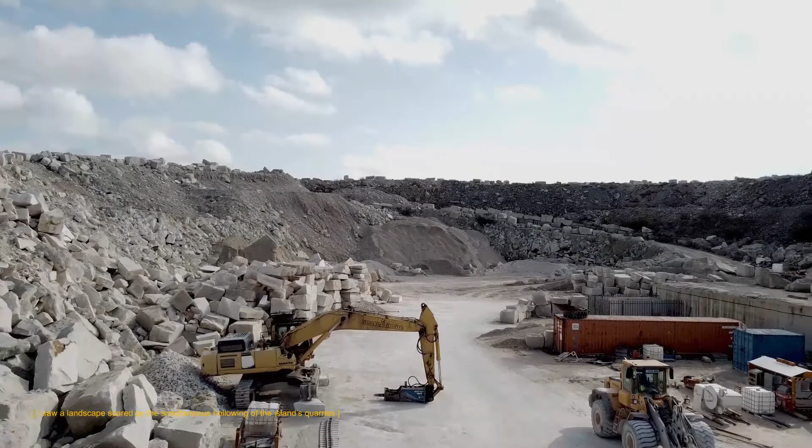On my visit to the Isle of Portland, I saw a landscape scarred by the simultaneous hollowing of the island's quarries and the layering of its offcuts. The scale of Portland's material absence is not comprehensible by the immediacy of the land around it, but only by way of recounting the limestone structures saturating the City of London.

Displaced for over 400 years, the island is one of the UK's largest sources of construction limestone, but the decline of solid limestone construction has replaced stone masonry with cement and cladding production that today accounts for more than 90% of the island's output. As a royal manor, the moving of royal land historically symbolized a transfer of authority, extracted only for the construction of seats of power in the city, governing religious, financial, and development priorities.

In the last century, the shift from sea-based to land-based transportation incentivized the pulverization of limestone into cement, requiring the grinding of 2 tons of limestone for every ton of cement, while breakages from the slicing of large dimension stone into thin, lightweight cladding produced 90% wastage during fabrication.

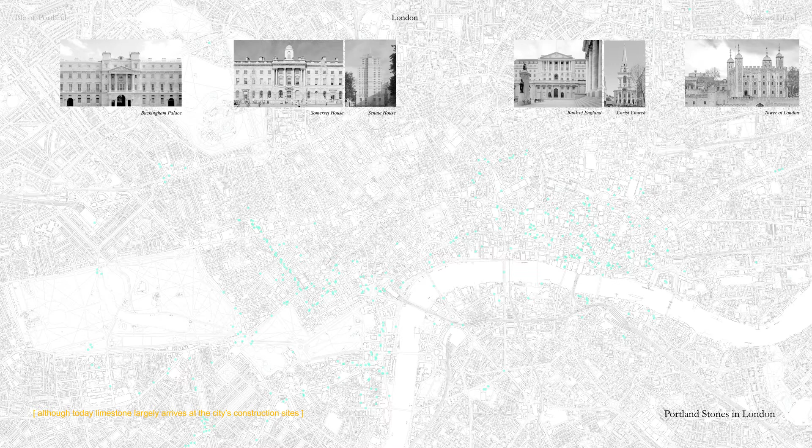Quarrying, the act of squaring natural stone, extracts terrains into unfinished cities, giving cities the illusion that earth does not exist. This is a map of London's remaining Portland stone buildings, although today limestone largely arrives at the city's construction site in the form of cement mixes.

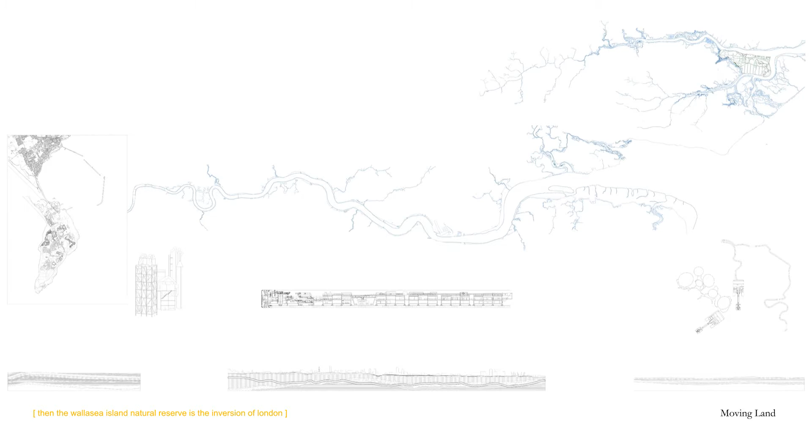If London is the inversion of Portland, then the Wallasea Island Natural Reserve is the inversion of London. The 269-hectare island nested in the River Crouch Delta near the coast of Essex is a reparation zone built to undo the destruction of urban construction.

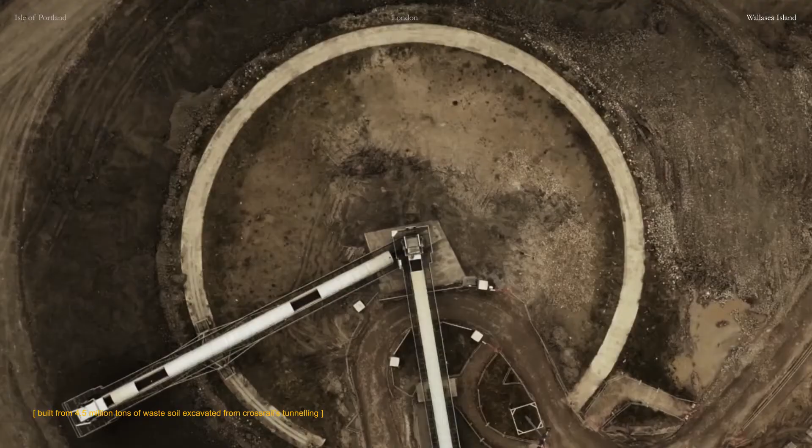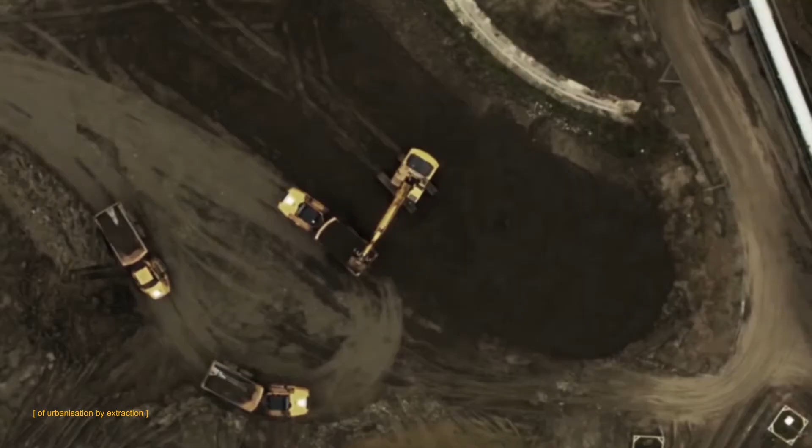Built from 4.5 million tons of waste soil excavated from Crossrail's tunneling, the construction of the island turns cities into sites of extraction for reparative landscapes, reversing a long-standing supply chain of urbanization by extraction through the creation of reparation zones.

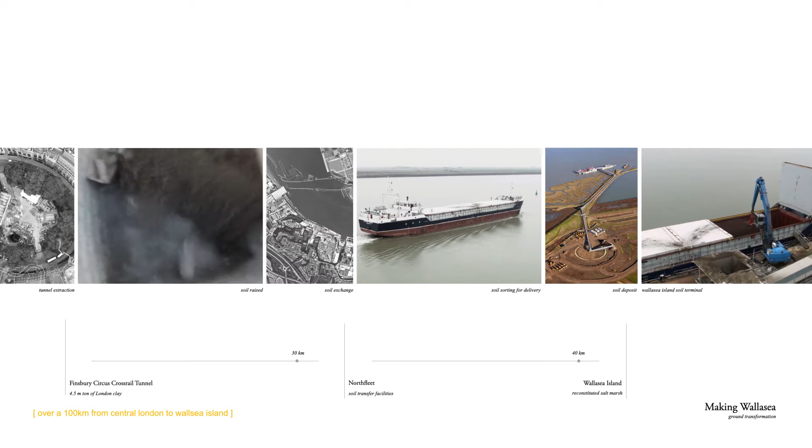To rehabilitate a land twice the size of the City of London, more than 2,000 large boatloads of soil was shipped over 100 kilometers from central London to Wallasea Island.

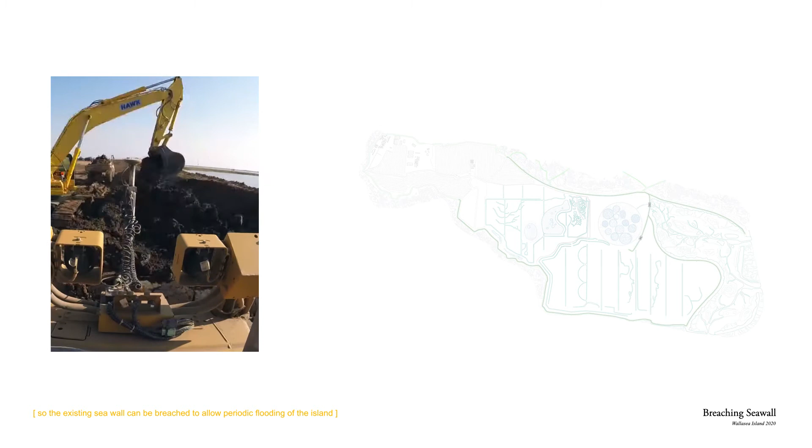The soil was used to raise the topography originally sitting 2 meters below sea level, so the existing seawall can be breached to allow periodic flooding of the island, while tidal regulating dams and saline lagoons monitor the salinity of the island's soil and inland waterways.

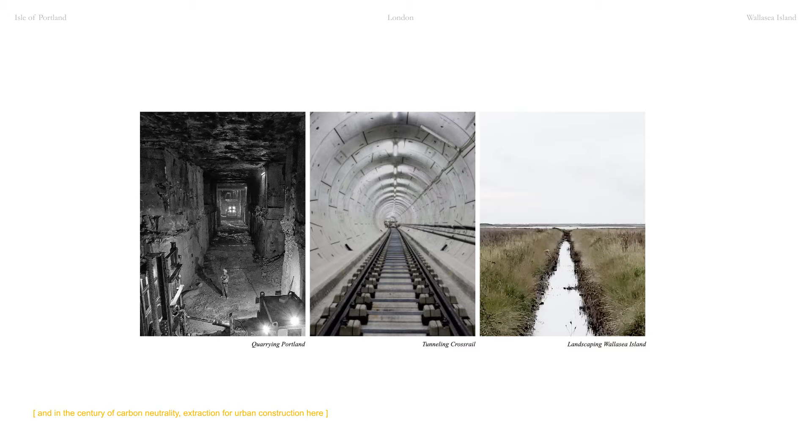Wallasea Island is the inversion of London, which in turn is the inversion of Portland. And in the century of carbon neutrality, extraction for urban construction here should demand the building of reparation zones elsewhere.

Therefore, the construction of the institute itself should become a part of the process of reparation, by challenging modern stone manufacturing and designing with large dimension stone in order to reduce waste and overall carbon emission.

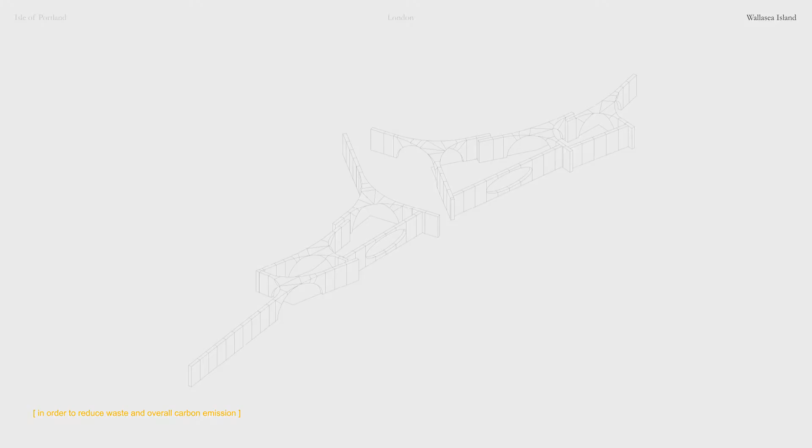As rainwater washes the limestone surface, calcium runoff settles on the ocean floor, forming new layers of limestone sediments while decreasing the acidity of the wetland and surrounding ocean, allowing the landscape to sequester more carbon from the atmosphere by enhanced weathering.

The Institute would extend the landscape into a sequence of limestone structures, hosting residences, laboratories, and a library for the long-term preservation of the island's soil, water, and vegetation samples.

Wallasea Island is not a naturally occurring wetland, but rather meticulously engineered and maintained by a network of urban machines. Its fragility and artificiality allow for its environment to be controlled, altered, and monitored, providing an ideal testing ground to institutionalize the production of future ecological infrastructures and for the deployment of reparation zones everywhere.

The weaponization of institutionalized techniques takes lessons from the painful history of the Portland prison, where the Convict Public Works was founded in 1850 to institutionalize the exploitation of prisoners into quarrymen, providing 10,000 tons of stones a week for the new Royal Navy base at Portland Harbor.

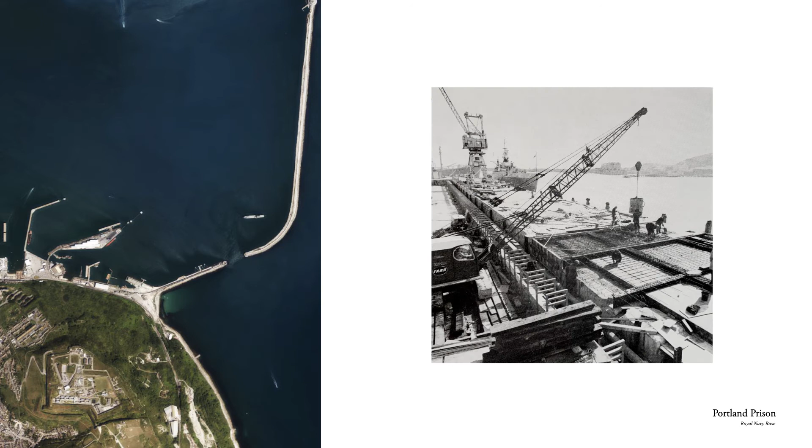The prison became an institute for the mass exportation of construction knowledge, as prisoners were sent to British colonies and forced to settle the New World with their acquired skills.

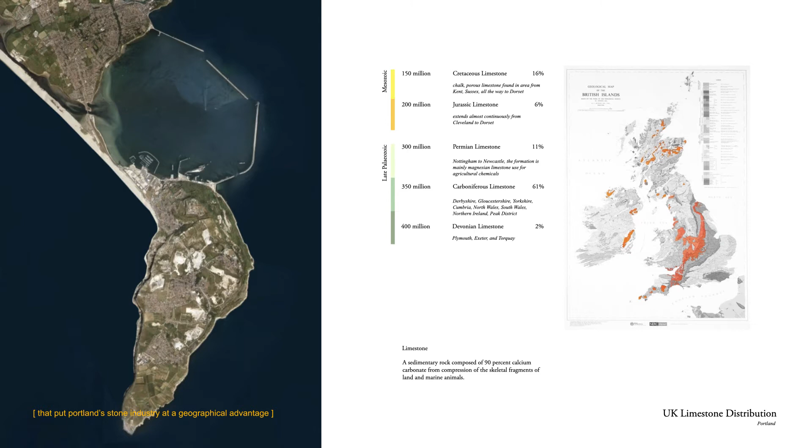The use of solid limestone construction can only be economically viable by reviving the maritime trade route that put Portland's stone industry at a geographical advantage to UK's inland limestone deposits 3 centuries ago. The act of shipping royal stones away from the city to Wallasea Island will signify a bifurcation of urbanization priorities towards the production of reparation zones.

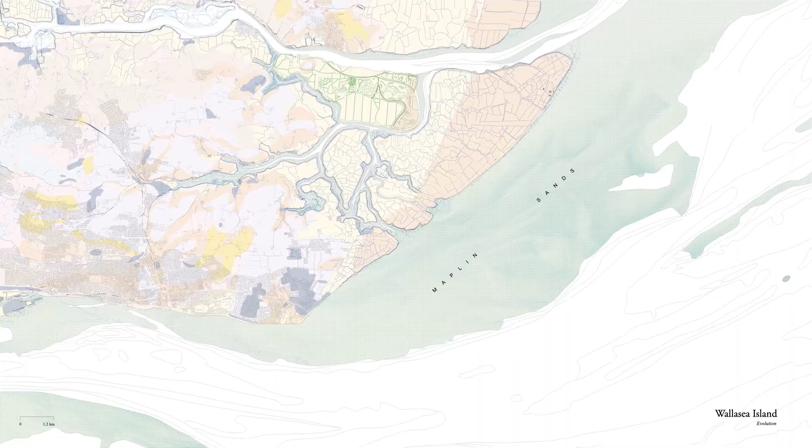The construction of the Research Institute is based on the deployment of solid limestone vaults, prefabricated in Portland, where the offcuts can be processed into reconstituted stone blocks, thereby reducing the total raw stone requirements.

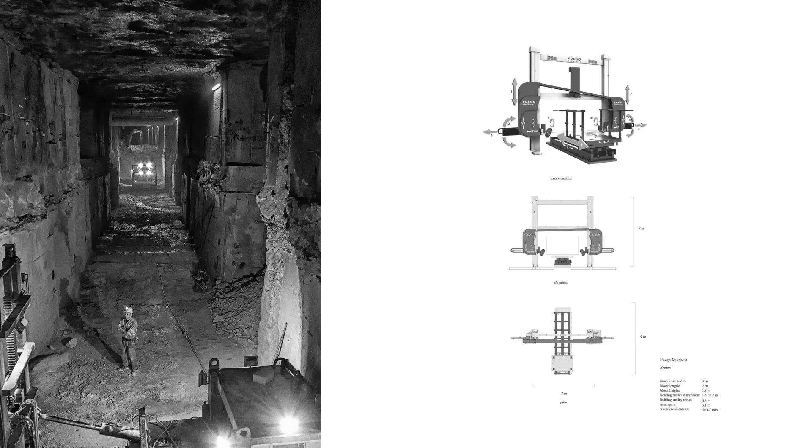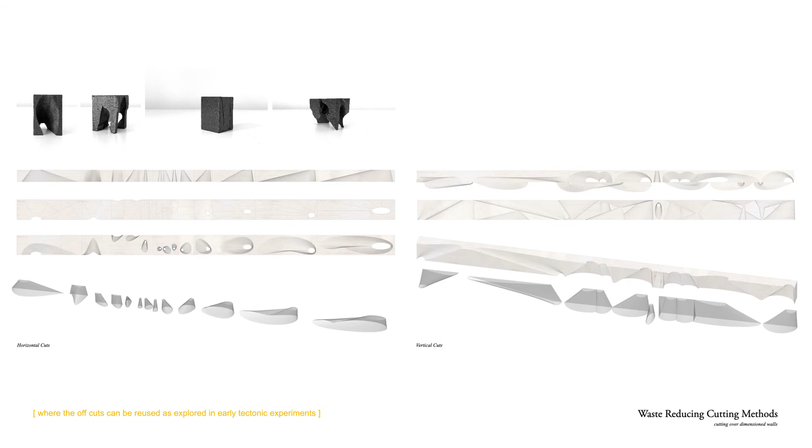Portland dimension stones are increasingly mined underground and processed with diamond wire cutters, where the offcuts can be reused as explored in early tectonic experiments, cut as an over-dimensioned habitable wall for landscape observation, where the offcuts can be flipped into columns to support a viewing platform atop the seawall.

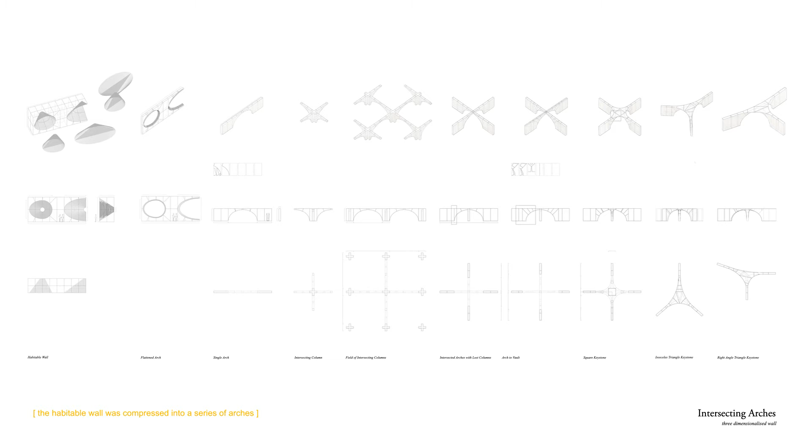To minimize stone use and maximize living space, the habitable wall was compressed into a series of arches and three-dimensionalized by forming intersections defined by a lost column. Therefore, the tectonic is not scalable in itself, but rather its spatial possibility lies in its multiplication.

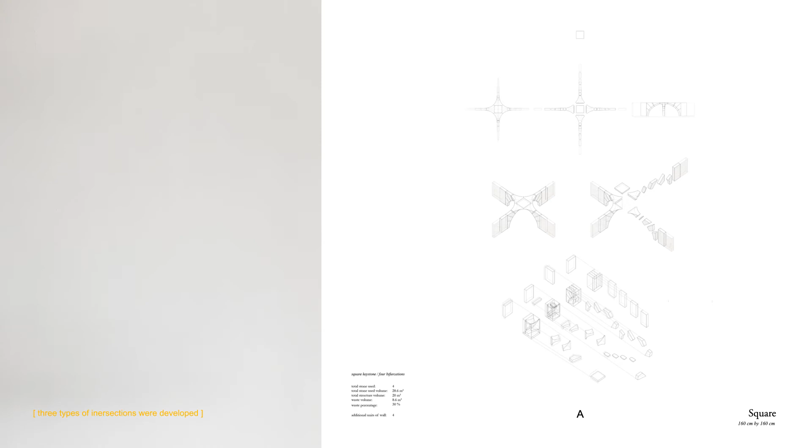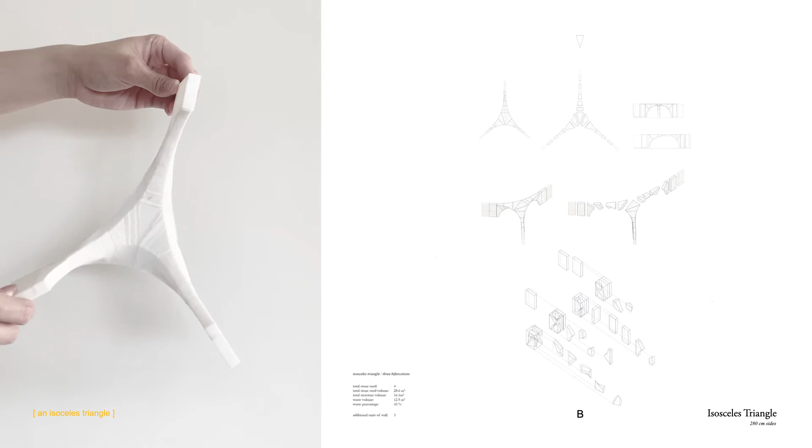3 types of intersections were developed based on different geometries of keystone. The result is a square that bifurcates a space equally in all 4 directions, an isosceles triangle that splits a single space into 2, and a right-angled triangle that combines tectonic A and B. Their intersections become multi-directional transition spaces deployed to organize larger rooms beyond.

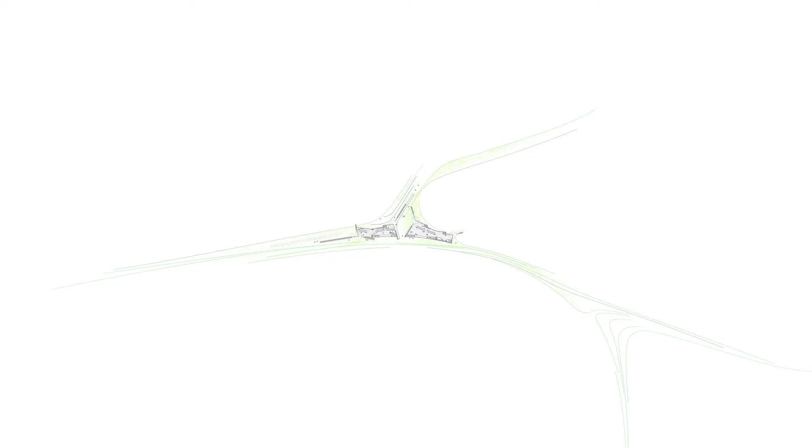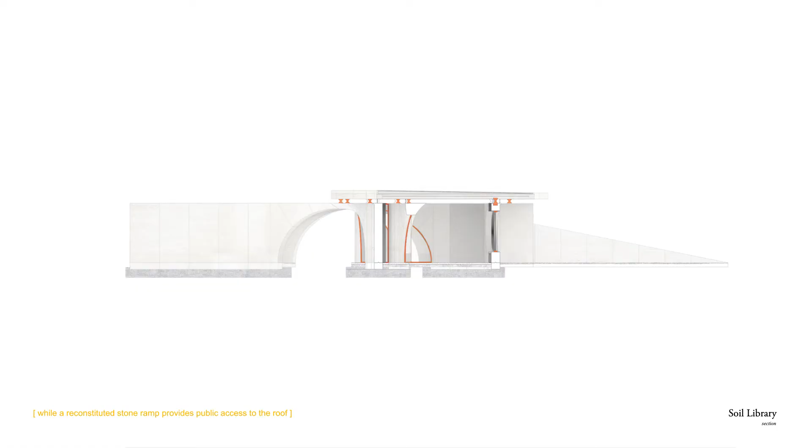As visitors walk towards the island, the soil library appears at the intersection of the jetty and the seawall, projecting from 2 sets of arches into an expanded horizontal view of the island, allowing for a moment of orientation upon arrival, while the reconstituted stone ramp provides public access to the roof.

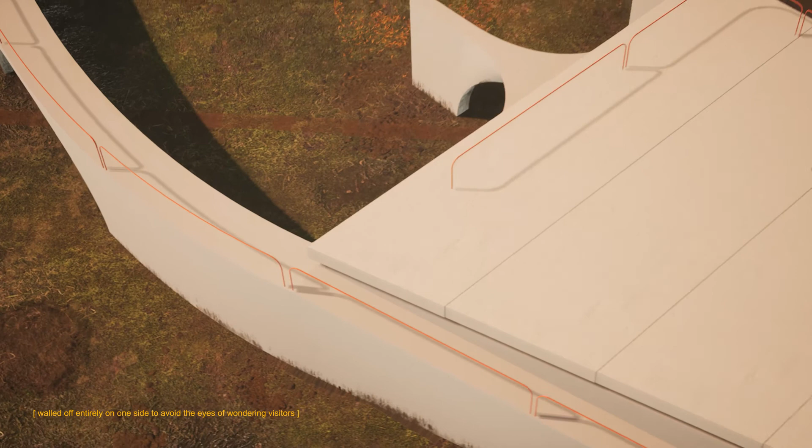Further along the footpath sits the researcher's residence, walled off entirely on one side to avoid the eyes of wandering visitors. The residence is layered with living quarters on one side and shared communal programs on the other.

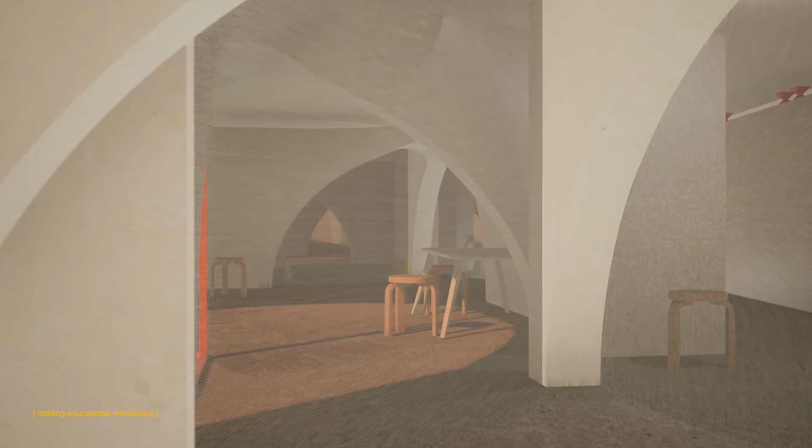The rooms are partitioned by intersecting vaults dressed with thick curtains that can be drawn for larger gatherings, hosting educational workshops on the construction of miniaturized ecologies.

3 courtyard buildings sit adjacent to the residence, facilitating indoor laboratories and semi-enclosed outdoor facilities for wetland fieldworks.

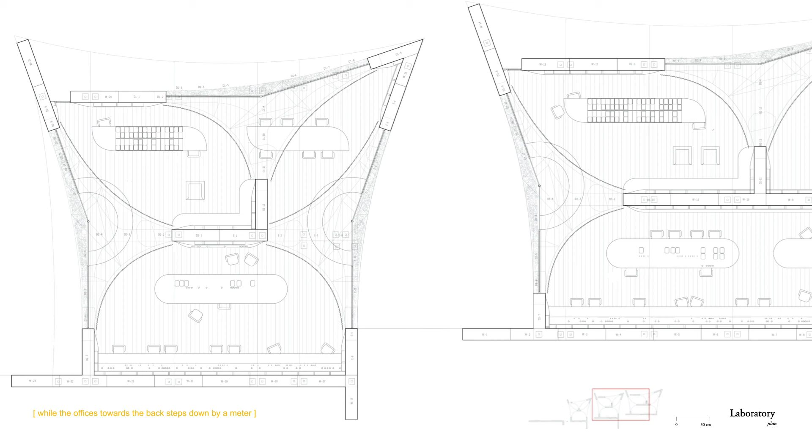Cut by a bifurcating seawall, the laboratories, in contrast to the residence, are oriented towards the public footpath, whereby the workings of the laboratory's front end is entirely open to public view, while the offices towards the back step down by a meter following the existing slope, gaining greater privacy.

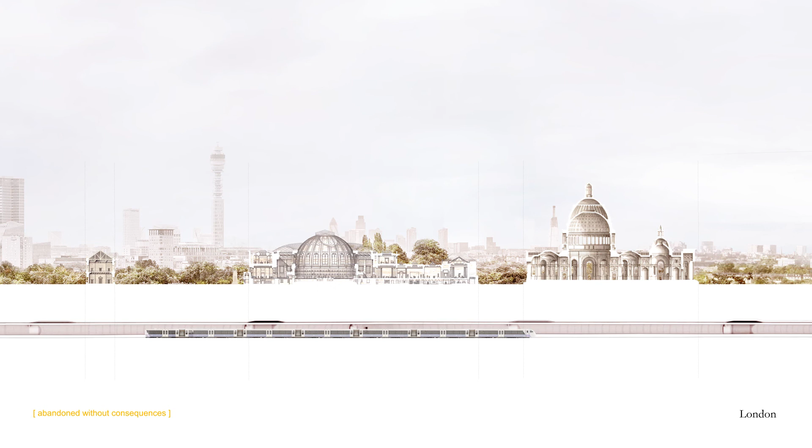Cities give the illusion that Earth does not exist. Sustained by extraction of remote quarries, and blinded by the efficiency of the modern supply chain, the design of our cities is the simultaneous destruction of distant landscapes, abandoned without consequences. Therefore, construction should demand parallel reparations and rethink the impact of building here on landscapes and environments elsewhere.

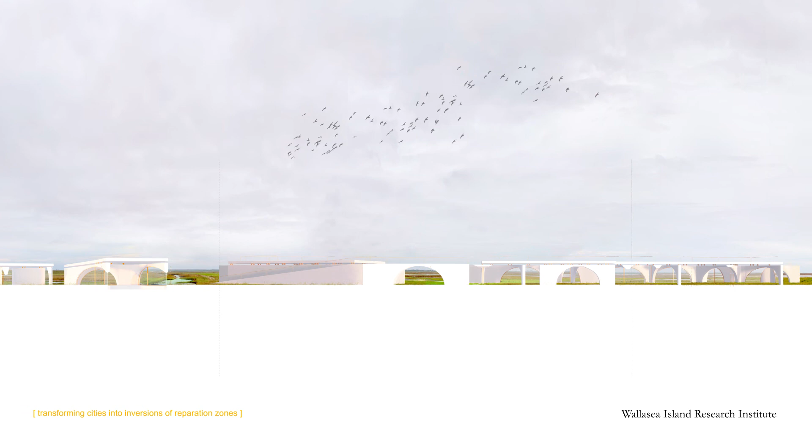Built with displaced stone on an island of displaced land, the Wallasea Island Research Institute will activate the island into a laboratory for the future deployment of reparation zones. The construction of the institute rejects urbanization by extraction, transforms cities into inversions of reparation zones, and questions the role of construction in giving back to the environment.